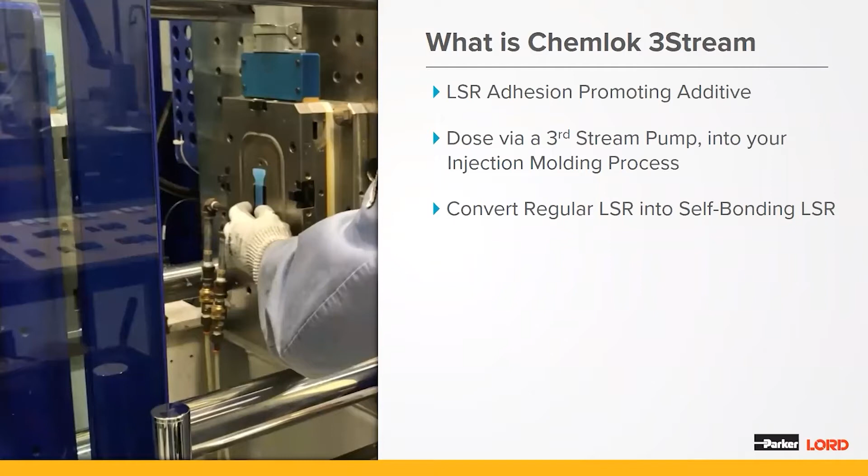What is Chemlok 3Stream? Chemlok 3Stream is an LSR adhesion promoting additive that converts regular LSR into self-bonding LSR. Our Chemlok 3Stream adhesion additive is designed for dosing via a third stream pump into your injection molding process. You can use standard dosing equipment to feed Chemlok 3Stream, very similar to feeding colorants into your injection molding process. To achieve excellent bonding performance, we recommend dosing Chemlok 3Stream at 1 weight percent to LSR.

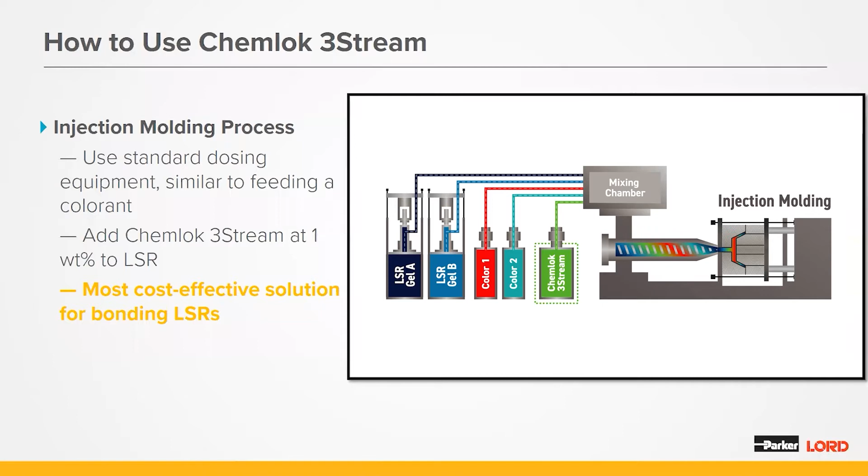This patent-pending technology is the most cost-effective solution for bonding LSRs. Raw material cost savings is just one of the many benefits to using this technology. In addition, the advantage of using Chemlok 3Stream impacts all aspects of your business, including optimizing manufacturing processes, reducing capital investment costs, and expanding your supply chain while maintaining excellent performance and quality.

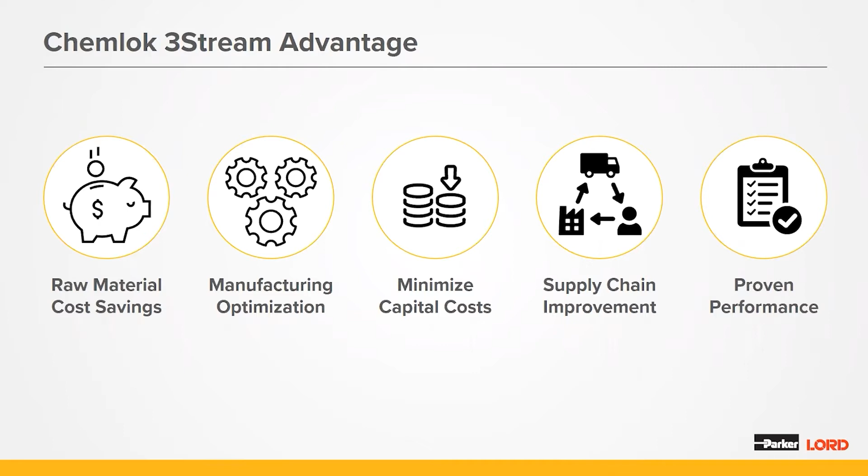So let's explore these advantages in more detail. Chemlok 3Stream can be used with regular LSRs, which are more readily available and more commoditized than self-bonding LSRs. By eliminating the need for expensive self-bonding LSRs, you could save up to 50% in raw material cost alone.

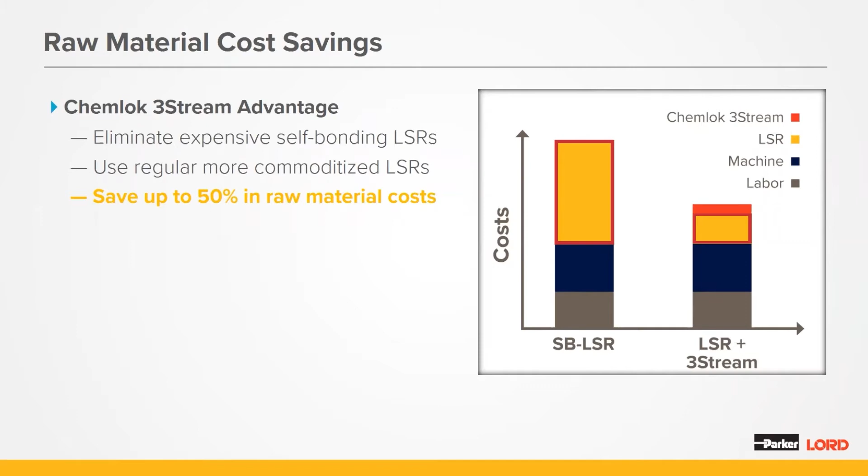Paul will explain later how Chemlok 3Stream can be easily incorporated into an existing LSR manufacturing process. In yellow, you can see the raw material cost savings is driven by the switch from expensive self-bonding LSR to regular LSRs with Chemlok 3Stream.

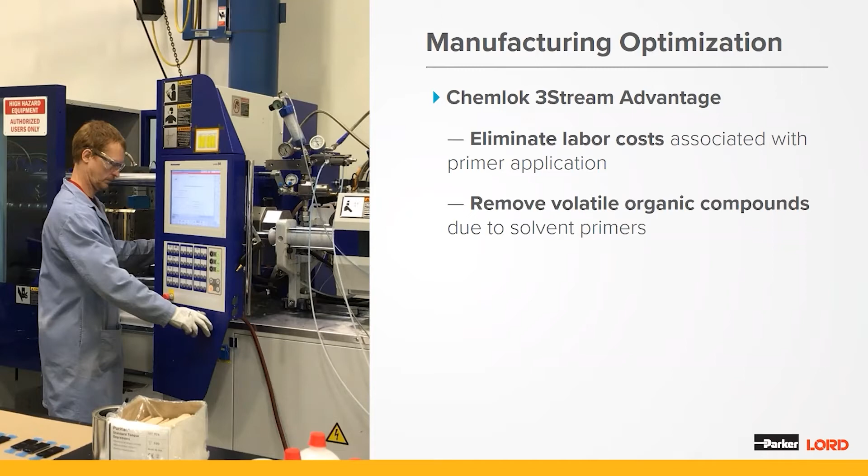Also, using Chemlok 3Stream has multiple advantages in the manufacturing process. If you are using a traditional primer or an adhesive system, you can eliminate the labor and challenges associated with the application of this type of bonding method. Many traditional primer or adhesive systems contain or are diluted with harsh solvents that present manufacturing hazards. By using Chemlok 3Stream, you can remove the volatile organic compounds associated with these harsh solvents from your manufacturing facility.

In addition, Chemlok 3Stream increases your design flexibility, as this one formulation is capable of bonding multiple substrates across a wide range of durometers.

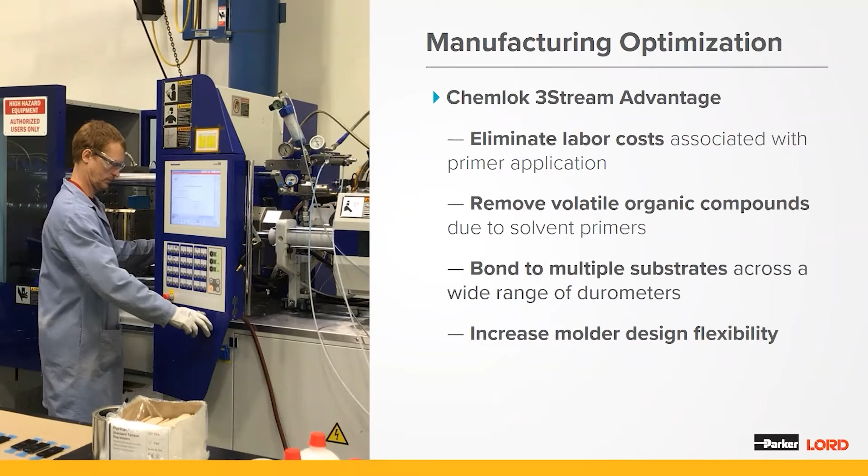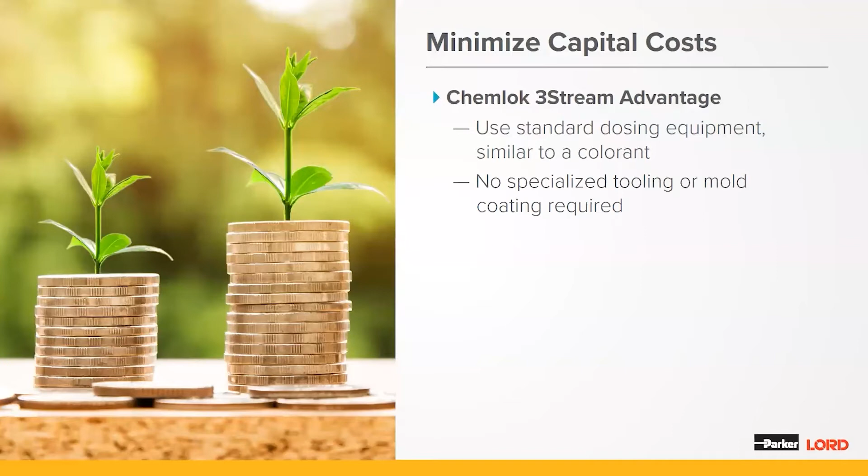Another great advantage of using Chemlok 3-Stream is the fact that you can use standard off-the-shelf dosing equipment, and no specialized tooling or mold coating is required, therefore minimizing your capital costs in comparison to some self-bonding LSR solutions on the market today.

By using Chemlok 3-Stream, you can improve your supply chain in several areas. The first area is in lead times. Self-bonding LSRs typically have significantly longer lead times than standard LSRs. By using Chemlok 3-Stream with regular LSRs, you can reduce your lead time, which in turn allows you to optimize your raw material inventory. Since Chemlok 3-Stream is used with regular LSRs, which are more readily available across many suppliers, you can expand your supplier base and improve the flexibility across your supply chain.

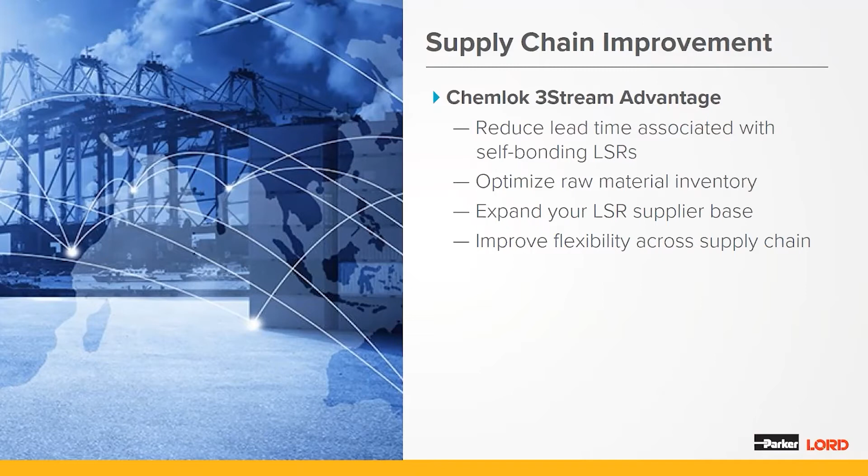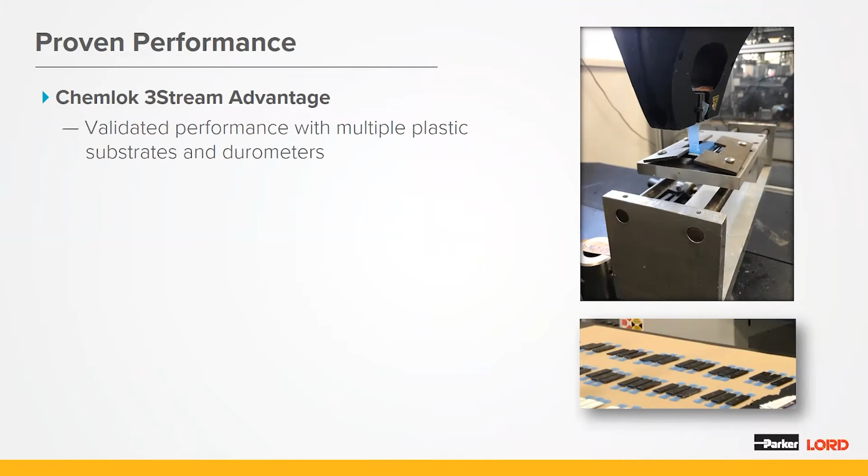With all of those advantages, you also get proven performance and quality every time. We've done extensive performance testing over the past several years and validated that Chemlok 3-Stream works with multiple plastics and clean metals across a wide range of durometers, from 30 up to 75 Shore A. Some plastic substrates include PBT, nylons, PPS, and PPA. As we expand this technology, the list of substrates and durometers continues to grow.

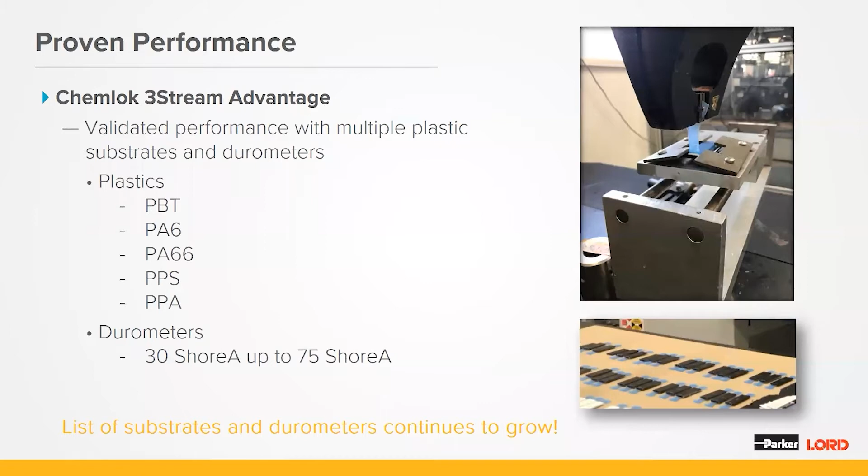So thanks for your feedback. I'll now turn it over to Paul to go into more detail regarding the bonding performance of Chemlok 3-Stream.

Thank you, Katie. So let's talk about some of the performance results with Chemlok 3S902, and this is the commercial name of our very first product in this product line.

The first thing I want to talk about is ease of use of this product. It's very easy to use with off-the-shelf equipment. As Katie mentioned, it's a low viscosity liquid. It's pumped in the same way that you would pump in a colorant or other additive. It gets injected into the stream just prior to the static mixer. In terms of injection molding parameters, there's nothing too outside of the norm. When you think about injection speeds, pressures, gate location, there's really no change that needs to be done there.

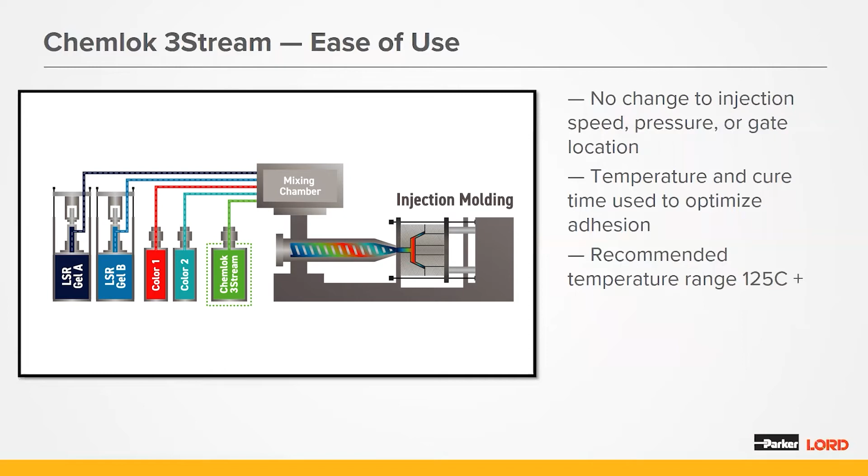Temperature and cure time do have an effect on the adhesion, and those can be used to optimize the adhesion. So with hotter temperatures and longer cure time, you will get better adhesion. There is a temperature requirement for this material, so we recommend that it's molded at 125 degrees C or higher, which will encompass nearly every LSR.

Next I'd like to talk about a benchmarking study that we did. I don't have time to get into a huge amount of detail, and I can only give a high-level overview of this study, but what I encourage you to do is go to the website. We have a white paper that we just published, and there's lots and lots of technical detail in that white paper. So if you're curious, I encourage you to go there and check that out.

What we wanted to do here was take our Chemlok 3-Stream and compare it to competitive self-adhesive grades that are on the market today.

In this study, we took three silicone systems. The first one was a 40 durometer standard non-self-bonding LSR, and we added 1% of the Chemlok 3S902 to that to convert it to self-bonding. We then compared that to two competitive products from different global manufacturers of LSR. We picked a 50 durometer grade and a 40 durometer grade. In terms of the plastic substrates that we tested it with, we used three plastics: PBT, which is polybutylene terephthalate, PA6, also known as nylon 6, and PA66, also known as nylon 66. After molding, the parts were post-baked at 150 degrees C for 1 hour.

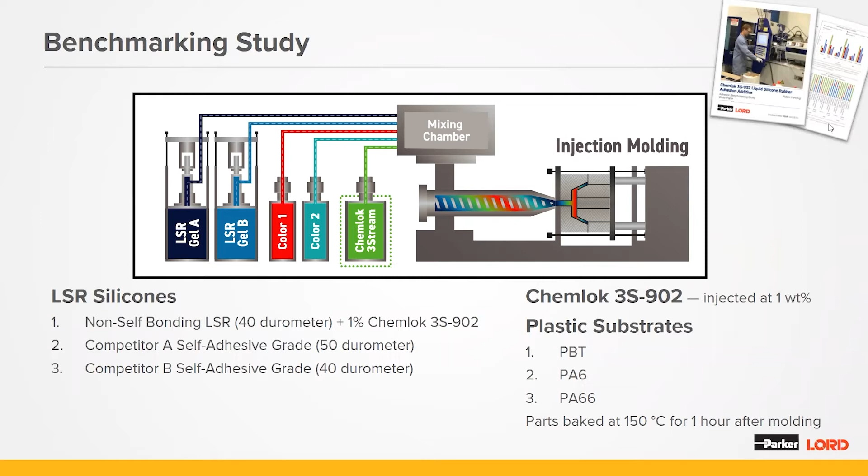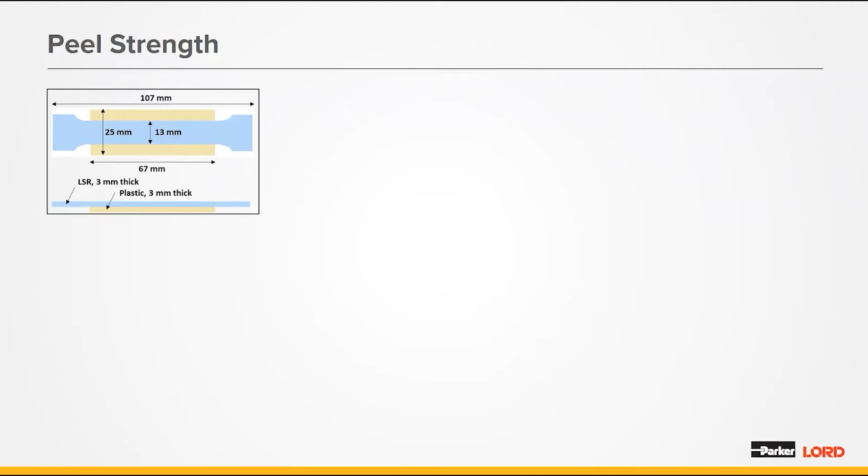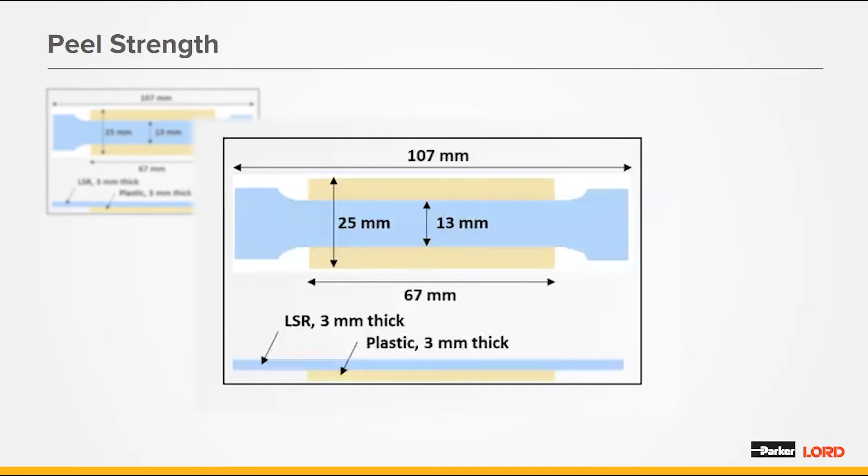Let's continue on, and I will show you the test results of our study. So when we mold parts, the first thing we check is peel strength. Before I go over the peel strength data, what I'd like to do is review the geometry of the test specimen, shown in the upper left corner of the screen. The blue color is the LSR, the tan color is the plastic substrate. You can see it's basically a dog bone type specimen that is injected across the face of the plastic coupon. With this geometry, it allows us to do a 90-degree peel test, which is how we normally test these types of materials.

So next, I'm going to show you the peel strength results. But before I put the data up, let's go over the chart.

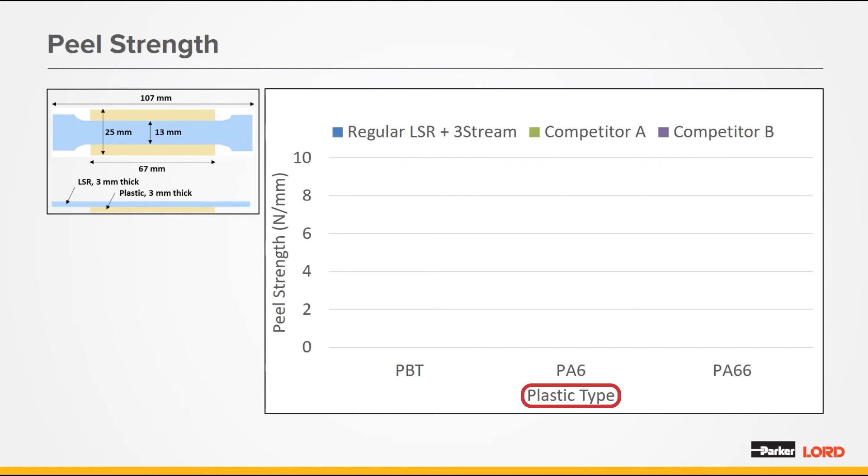So the vertical axis is peel strength, given in newtons per millimeter. The x-axis is the type of plastic. When we look at the blue bar, which is the regular LSR plus 3-stream, you can see we're pretty stable across the 3 different grades of plastics, with peel strength just above 6 newtons per millimeter, which is actually quite strong.

In this case, the rubber was actually failing, so this more or less measured the strength of the rubber. I'm going to talk about failure mode on the next slide so you can get a better feel for what that looks like.

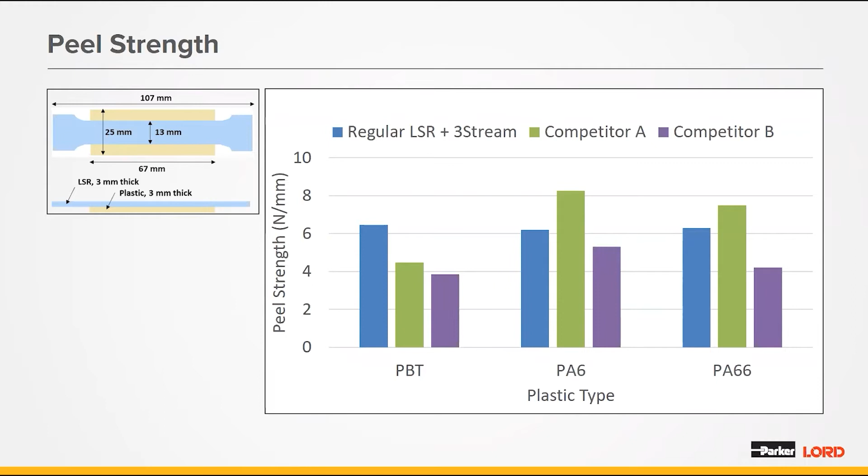When we compare that to competitor A, the 3-stream system performed better on PBT. On PA6 and PA66, we were a little less, but I'll point out that competitor A is a 50 durometer silicone versus the regular silicone we used, which was 40 durometer with 3-stream. So the higher value is just due to the stronger silicone used for competitor A. When you compare it to competitor B, we've exceeded the performance in all cases. Bottom line: Chemlok 3-stream gives excellent adhesion on these 3 plastics.

Let's talk about failure mode. We just talked about peel strength. After we peel the parts, we take the part and look at it to determine where the failure happened. There are 3 potential failure modes: cohesive, boundary layer, and adhesive.

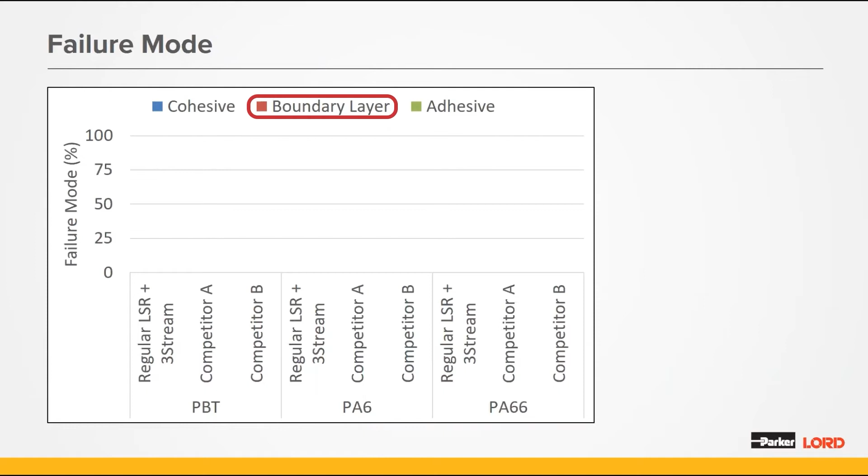Cohesive failure means the rubber failed - this is what we like to see, meaning the adhesive strength is greater than the strength of the rubber. Boundary layer is something in between cohesive and adhesive, meaning you might have a very thin rubbery residue left on the coupon, but it's not quite cohesive failure. Adhesive failure means a clean peel, so you're not left with any residue on the plastic and the silicone cleanly peels off the substrate.

So let's first look at cohesive failure. In the example of PBT, the 3-stream modified system significantly outperformed both competitor A and competitor B, shown by the much higher cohesive failure. On nylon 6, everything is about the same and performed reasonably well. On PA66, the 3-stream system outperformed competitor A a little bit, and greatly outperformed competitor B.

When we start filling in the rest of the failure mode picture, next we'll add boundary layer failure, and the story doesn't change a whole lot, but on PBT, performance is much better with the regular LSR and 3-stream system. Nylon 6, everything's pretty equivalent. And on nylon 6.6, the regular LSR was about the same as competitor A, but much better than competitor B. Then the balance is adhesive failure.

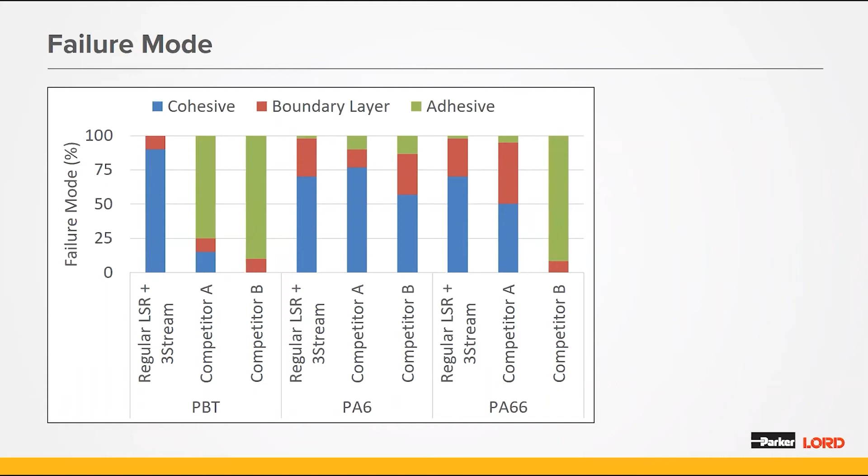You can see quite a bit of adhesive failure on a lot of the competitive products, but the 3-stream system had almost no adhesive failure in the entire test. Bottom line: Chemlok 3-stream achieves very strong rubber tearing bonds.

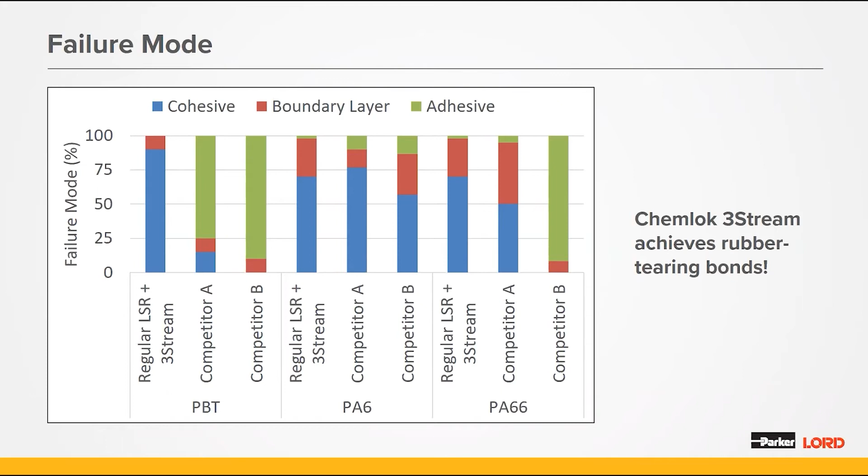So let's talk about curing performance. Whenever we mention putting additives into silicone, people are rightly concerned about whether it affects the curing performance and whether it affects the mechanical properties. We're going to address those 2 concerns right now.

The way we look at curing performance is with an MDR curing curve. MDR stands for moving die rheometer, and in this test it's performed at 160 degrees C in a rheometer. You're basically watching the rubber become stiffer as it cures. The vertical axis is torque, and the horizontal axis is time. When we look at the curve for regular LSR, that's a standard normal looking cure curve - you can see it's more or less cured in about 30 seconds.

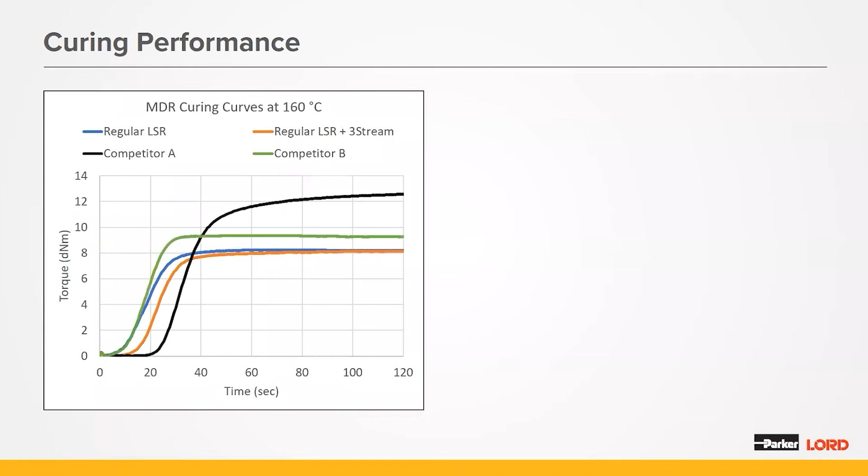When we add 1% 3-stream to the regular LSR, the cure curve shifts a little bit to the right, so it does slow it down modestly, maybe by a few seconds. However, when we compare it to competitor A, competitor A is significantly slower in curing than either the regular LSR or the one modified with 3-stream - so we cured a lot faster in that instance. Compared to competitor B, it's got about the same cure speed as the regular LSR. But the bottom line is that the 3-stream modified system maintains that curing range within a normal range for LSR.

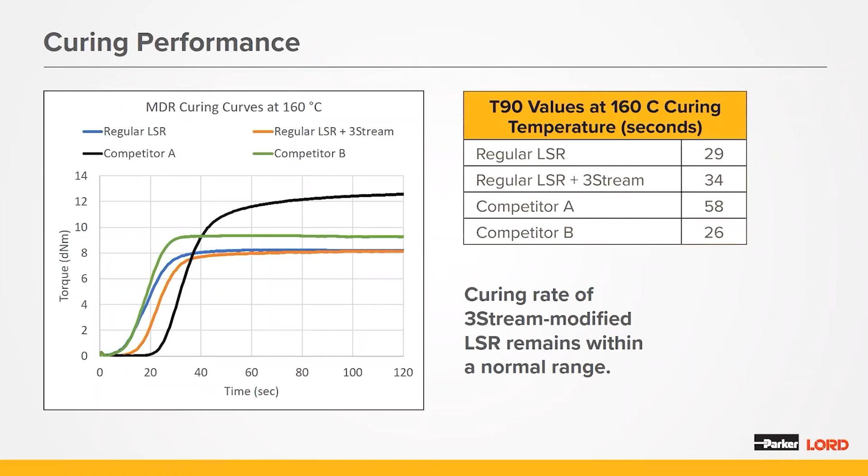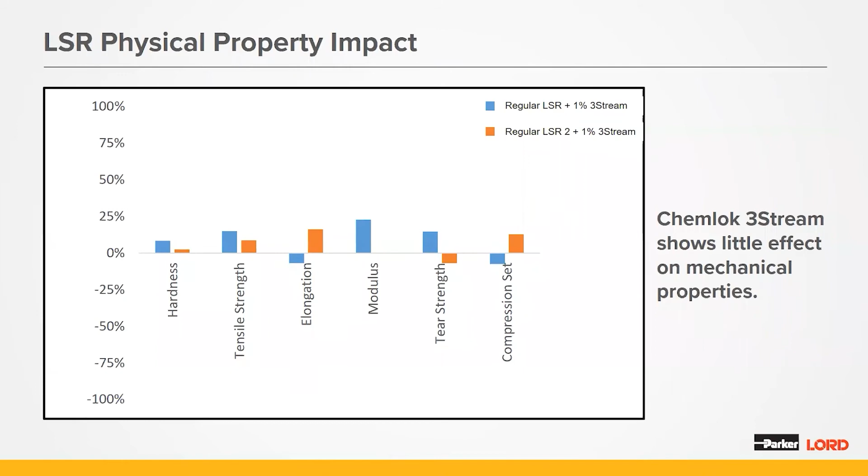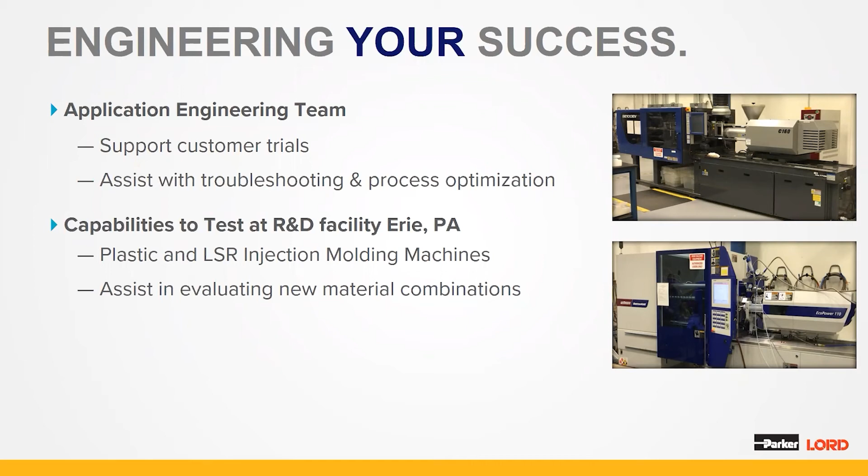With that, I will turn it back over to Katie to wrap us up. Thanks, Paul. Excellent overview of our technologies.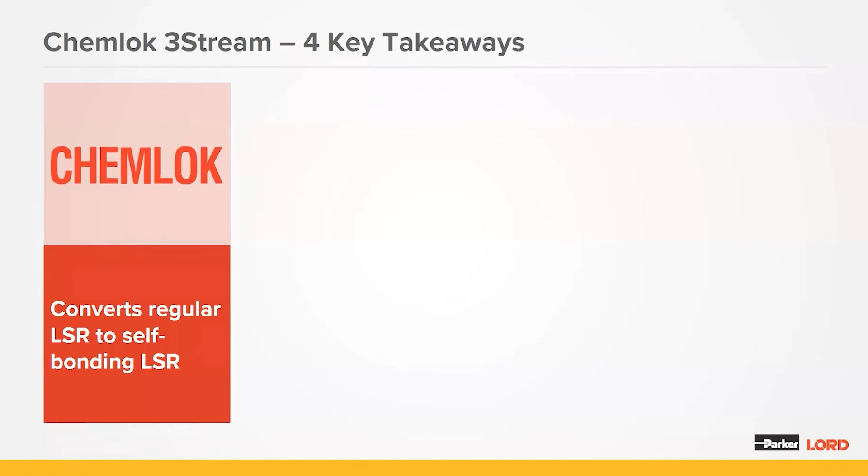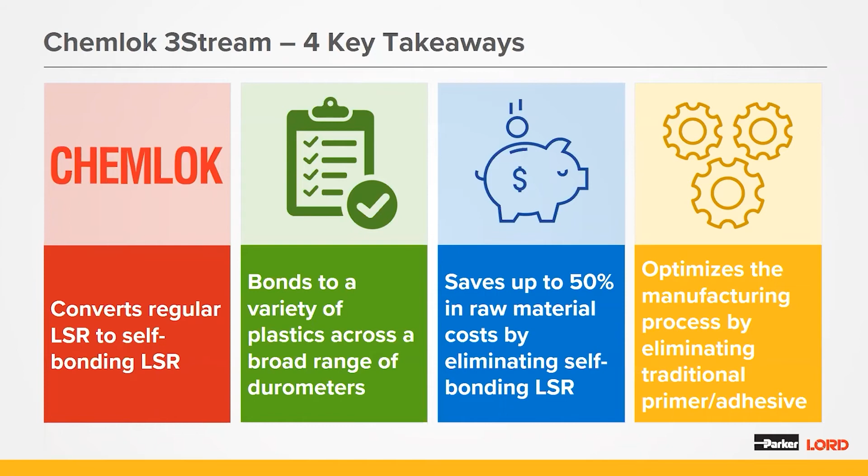To summarize today's webinar, Chemlok 3-stream can convert regular LSR into self-bonding LSR, and it bonds a variety of plastic substrates across a wide range of durometers. The big key advantage to Chemlok 3-stream is the raw material cost savings associated with eliminating expensive self-bonding LSRs, as well as eliminating traditional primer and adhesive applications, improving your overall manufacturing efficiency.